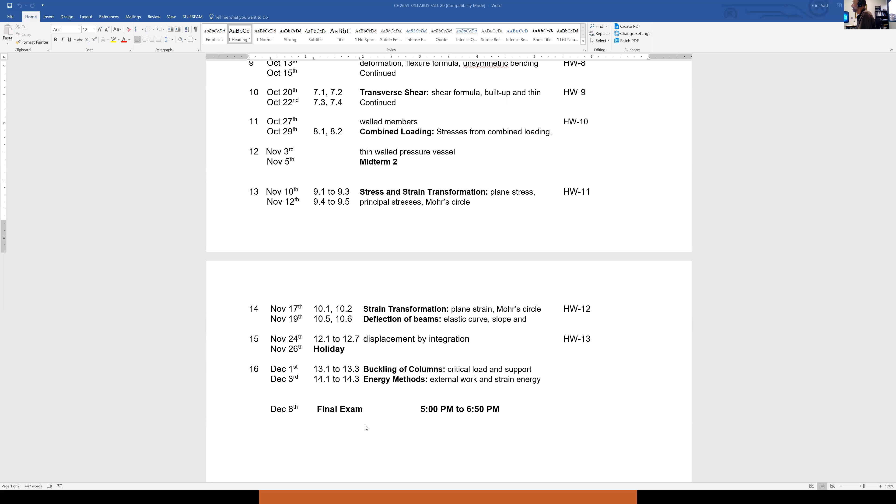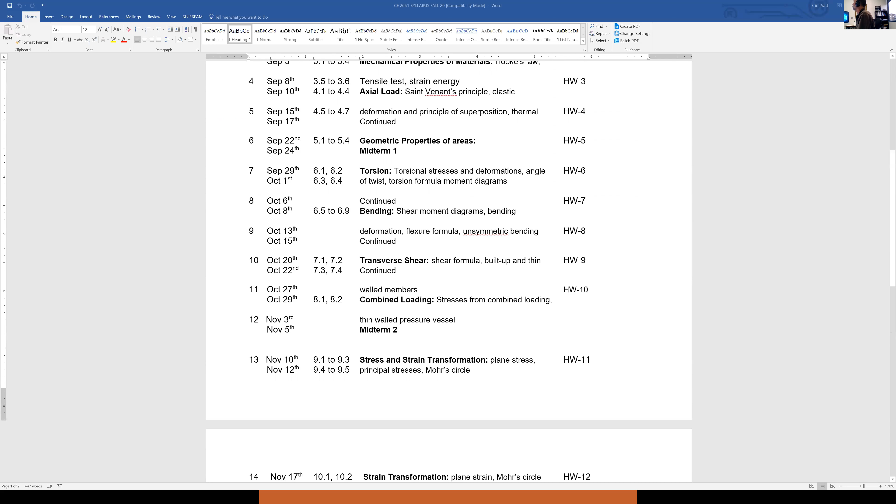Okay, and then let's do tonight. Tonight we talk about combined loading. Yes David, final will be cumulative. Tonight we talk about combined loading, where we are going to combine moments.

What we talked about last lecture, we talked about having biaxial bending, where you can have bending moments about the x-axis and or you can have bending moments about the y-axis. Well, now we're going to combine it all, no pun intended, to add an axial loading to moments that could be about the x or the y-axis.

So as I said, we have both bending stresses and axial stresses are normal stresses. Bending moments, My over I, create normal stresses. Axial loads cause normal stresses as well. So that means bending stresses and axial stresses can be added directly by superposition.

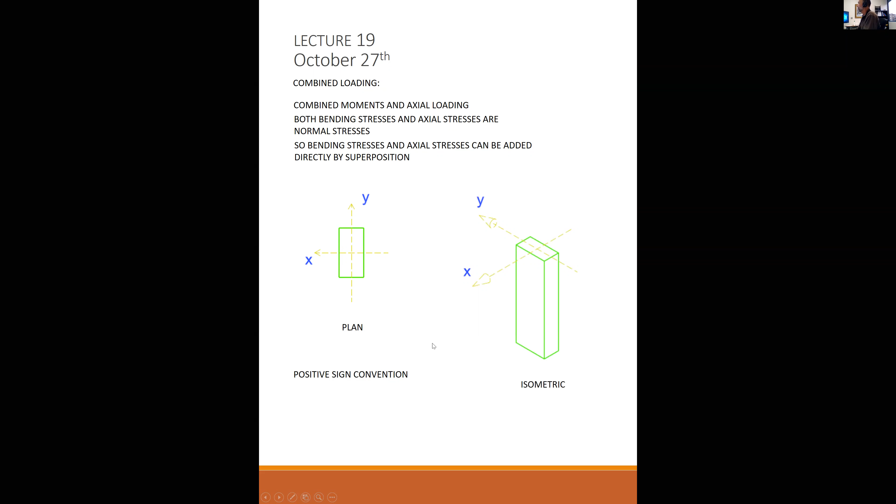Okay, so let's reiterate what a positive sign convention looks like. This is my positive x-axis, this is my positive y-axis. We talked about this last time when we introduced the flexural formula. And remember what I said, why is the x-axis off to the left? The answer is because I said it is, that's why, it has to be, or else positive moments won't cause compression in the top of the beam like they should. So if I look at an isometric view of my positive x-axis, my positive y-axis, it looks like so.

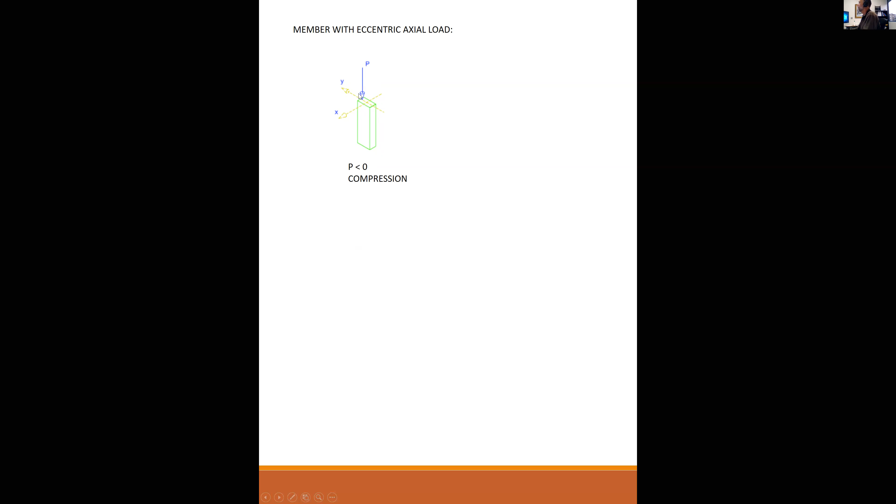So now we're going to add to our bending moments, we're going to add axial load. So if you have a load that is going down, then P is less than 0. P is a negative load that's going down and it's compressing the member. So if P is less than 0, that is compression, and as you can see, this block is being compressed by this load going down into it. If P is greater than 0, it is tending to pull the member apart, and that would be putting tension into there. So the sign convention is important when you start using the equations - you need to be sure you have the right positives and negatives where they belong.

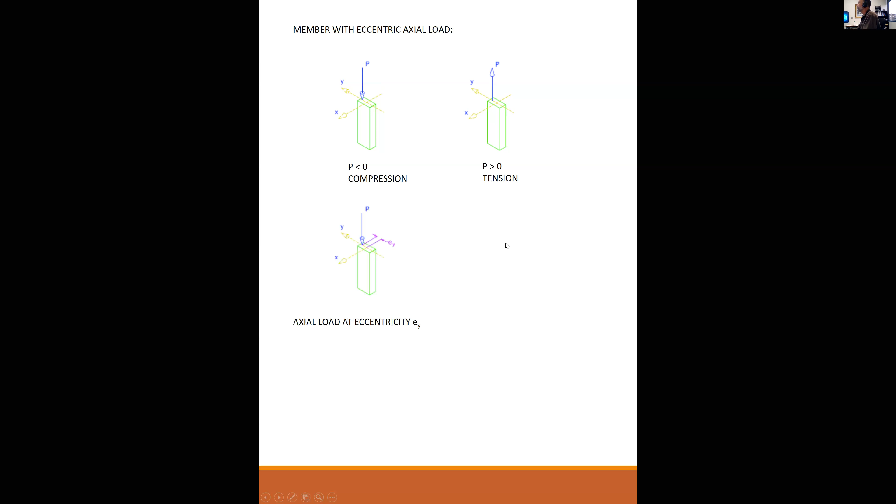So we can have an axial load at some eccentricity. Eccentricity, E sub y, in this case, is an eccentricity in the y direction. And an axial load at an eccentricity creates a bending moment. So we can replace an axial load at some eccentricity with an axial load located right at the centroid, and we have to add in a moment about the x-axis, m sub x. So m sub x is equal to the axial load P times the eccentricity in the y direction. This is a direct result of superposition.

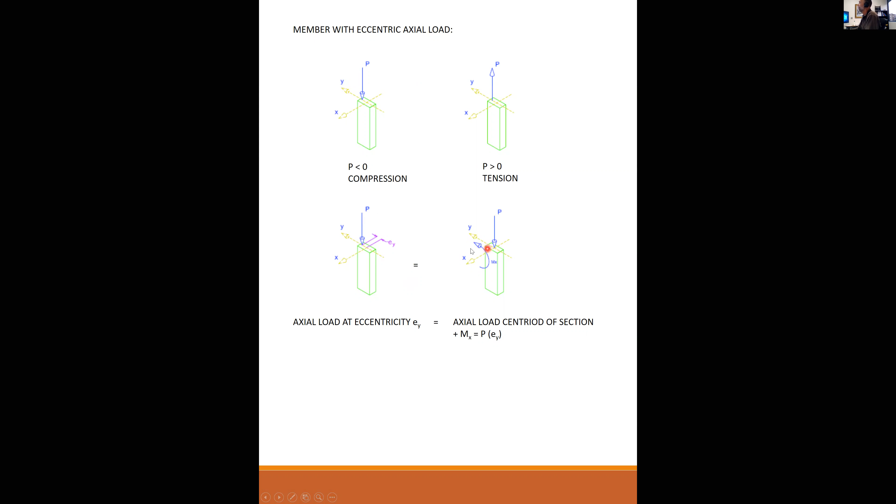And this is saying that this condition here, this axial load with this eccentricity, is equivalent to an axial load going right down the middle of the beam plus an added moment. And this is the way we're going to look at things. If you have this condition, you need to convert it to this condition so that we can solve it for your stresses.

Likewise, we can have an axial load that is located with some eccentricity to the y-axis, which is an eccentricity in the x direction. So this would be E sub x, an eccentricity in the x direction, and it is creating a moment about the y-axis. So I can take my axial load and relocate it on the centroid of the beam as long as I add a moment to compensate for that, that moment being equal to P times E sub x. So you can have an eccentricity in the y direction, you can have an eccentricity in the x direction.

You can have an eccentricity really in any direction, as long as you bring that resultant back to the 0,0 point at the intersection of your coordinate grid, the centroid of your beam, and add the appropriate moments.

E is a measure of how far off from the centroid that load is. It's inches, it's a distance. Does that answer your question? Yes, thank you. Okay.

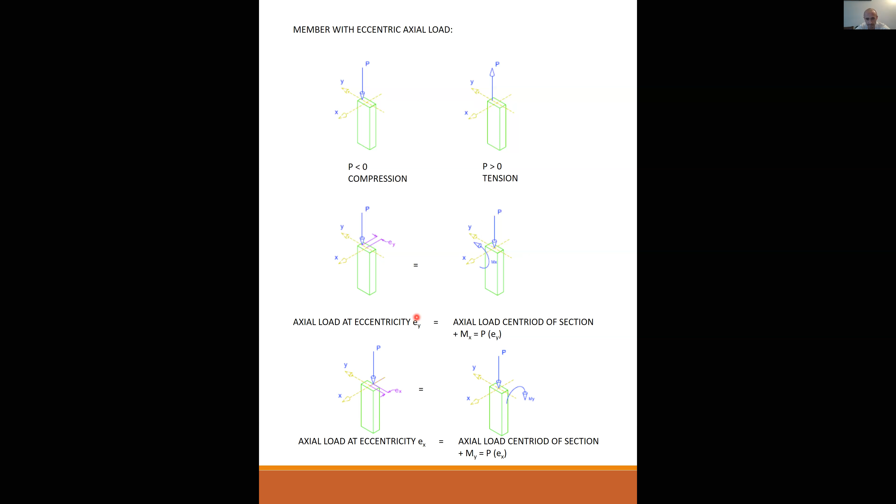All right, so if we pull it all together, axial loads create a stress. Remember, we're going way back to week number 2 or 3. Axial loads create a stress equal to P over A. We kind of started with that. And then we have our flexural equation here, minus mx y over I, plus, when we make it a biaxial equation, my x over Iy. So this is the total.

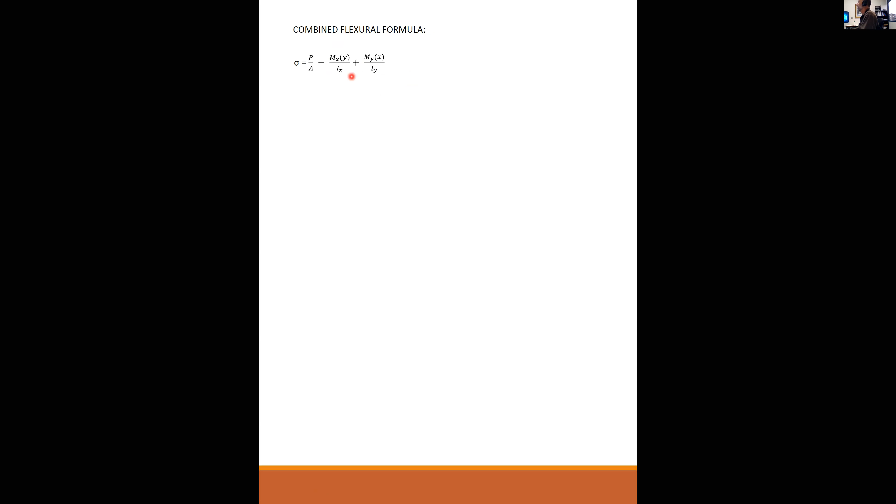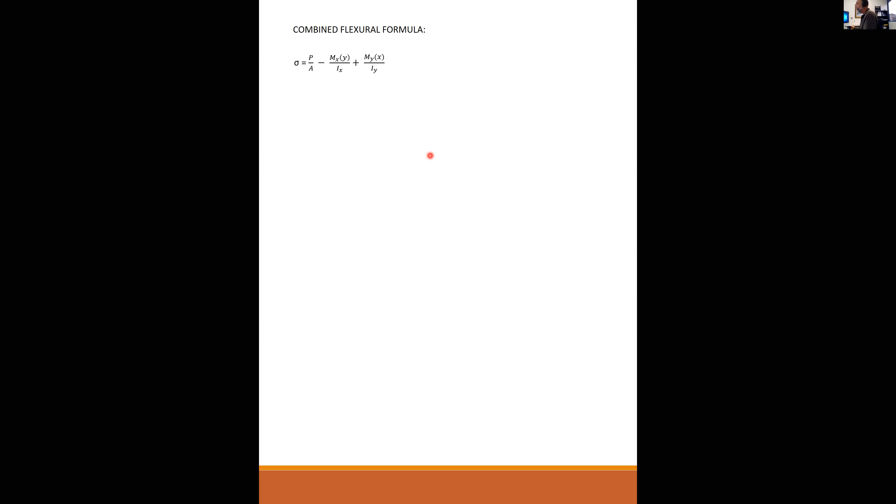When we first introduced P over A, that was just kind of a fraction of it. When we first introduced my over I, that was a fraction of it. This is the most general form of the equation that accounts for axial load, moments about the x, moments about the y. Any questions about this? Okay.

Again, if P is pointing down, then it is going to be less than 0. It is in compression. If P is pointing up, P is greater than 0, and it will be representing tension.

Mx and My are both equal to P times the appropriate E about each axis. The sign of P is determined by whether it's in compression or tension, whether that load is up or down. The sign of E, the eccentricity, positive or negative, follows your axes. If it's in the same direction as the positive Y, then it's a positive number. If it's in the opposite direction, it's a negative number. The combination of the two ought to produce moments that follow the right-hand rule for your sign convention.

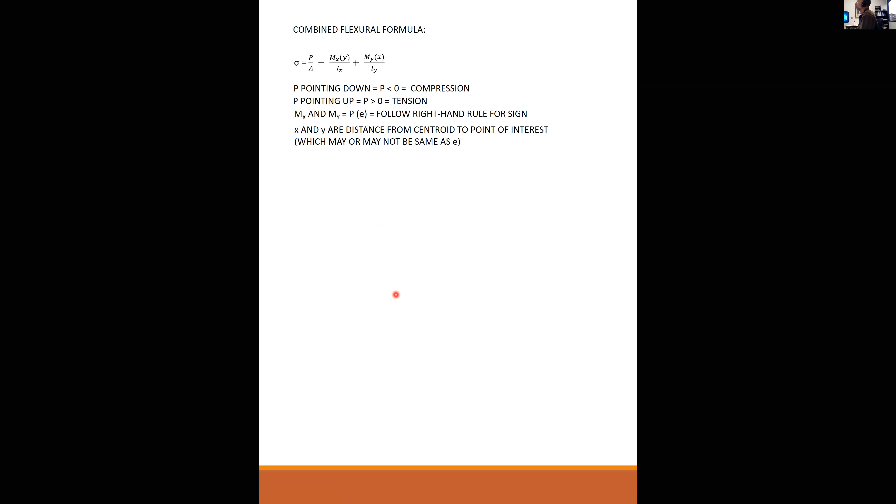And as I said, X and Y are distance from the centroid to the point of interest, which may or may not be the same as E. X and Y are positive or negative as determined from the sign convention of the axis.

Okay, so these X and Y's are the distance from the centroid to the point of interest, that's this guy and this guy, not to be confused with E. E is in the mx and the my, so E is the eccentricity of the load. X and Y are the distance from the centroid to the point of interest. Like if I say, what is the stress at the upper right corner, well then X and Y are the distances from the centroid to the upper right corner. That's not the same thing as the eccentricity of the load, okay?

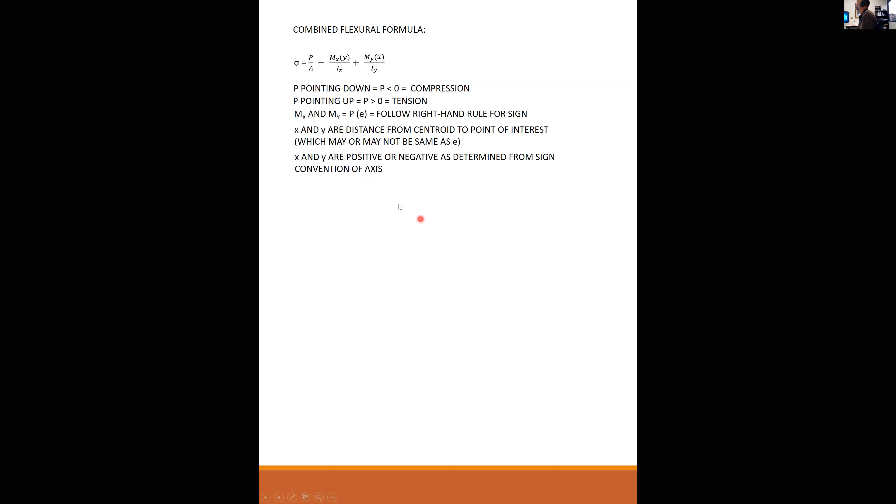So I think maybe some examples might help. Okay, so if this is our section, the good old 2x4, and this is my loading. My loading is 10 kips located on the y-axis. So the eccentricity in the x direction is 0, but the eccentricity in the y direction is 1.5 inches.

So if this is our situation, what are the stresses at this corner A and this corner B? First step, P is pointing down. P is tending to put this element into compression, it is compressing down on it. So we must take P to be minus 10 kips.

Again, I cannot reiterate enough how important it is to keep these sign conventions straight. Okay, so if I take my P and relocate it to the centroid, then I must add a moment to compensate for that effect. And that moment is equal to P times the eccentricity in Y.

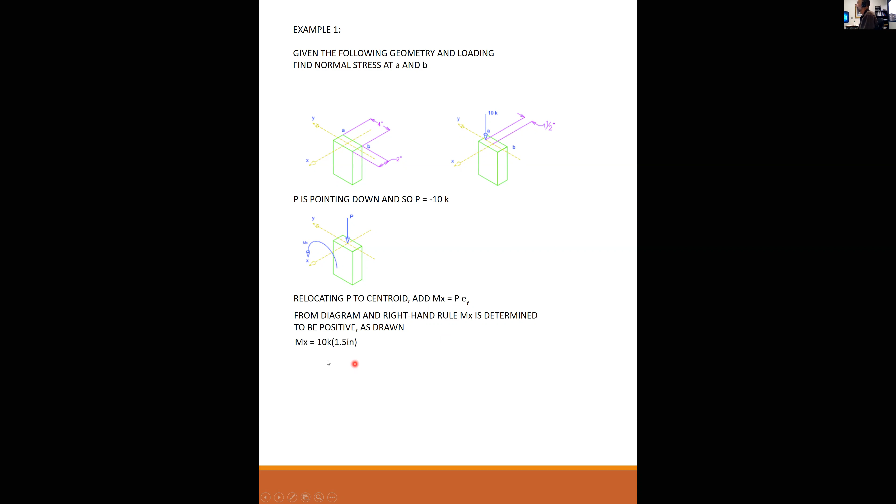From the diagram and from the right-hand rule, mx is determined to be positive as drawn. If I take my thumb along the x-axis and curl my fingers in the direction that this load would tend to rotate, then I get a positive mx. So mx is equal to 10 times 1.5 inches, which is 15 kip inches.

Okay, so let's slow down for a moment and really analyze this. It would be confusing, I think, to say right here, I said P is equal to -10. So why didn't I do -10 times positive 1.5 inches? The 1.5 inches is in the positive Y direction. The 10 I just said is -10. So how come the moment's not -15 kip inches?

Are you guys confused about that? Is this clear? Am I making it worse? What do you think? Well, is it the right-hand rule?

So what I'm saying is the final definitive answer on these moments is the right-hand rule. So if you look at this load, don't think of it as positive or negative for the moment. You just see that it's pushing down, and pushing down would tend to rotate this way. So I draw my moment in the direction that it would tend to rotate.

I'm replacing this eccentricity with this moment. And then I put my thumb on the x-axis, curl my fingers. Is it in the same direction as that moment? Yes, it is. So that means it's positive. So this is a positive 15 kip inch moment.

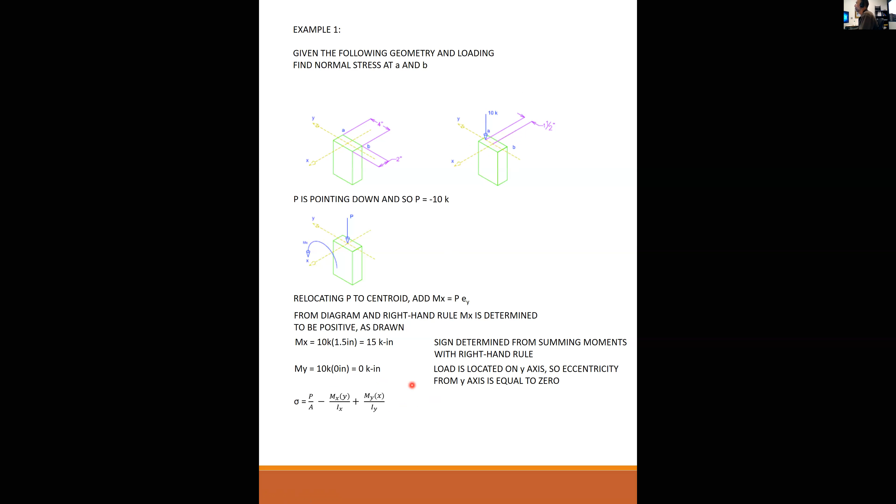Okay, so using my general equation for normal stress, the flexural formula, I can now start plugging in some numbers. The area of my 2x4 is 8 inches squared. The moment of inertia, we've got this memorized by now, is 10.67 inches to the fourth. Iy is 2.67 inches to the fourth. At point A—now here's where it becomes very critical.

E was the distance to the load, and we're saying use the right-hand rule to determine if that moment's positive or negative. But X and Y rigorously follow the axis conventions, okay?

So the A corner is this back corner over here. In the direction of Y, it is a positive 2 inches. In the direction of X, it is a minus 1 inch because it's opposite of the axis. This is followed rigorously, and is really the only way to get the proper X and Y values to plug into here and here to get your normal stresses.

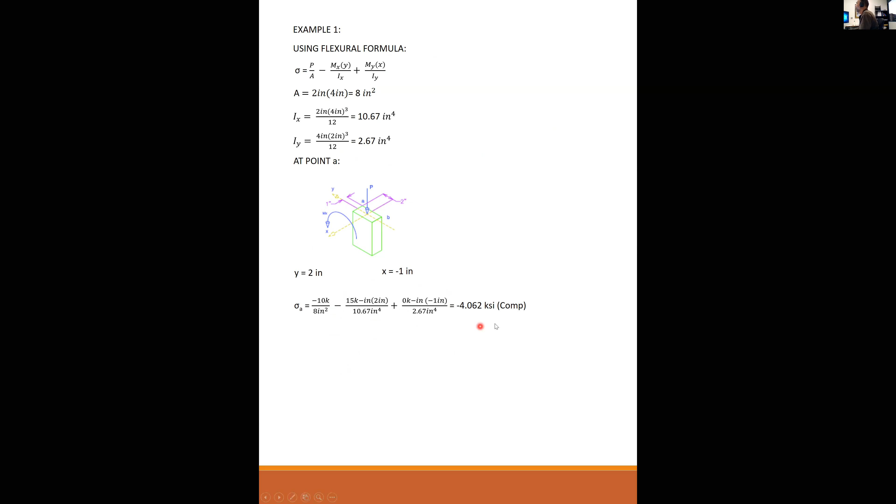Okay, so I'm now plugging in sigma A, the normal stress at A, is P over A. So there's where I'm saying that's where your minus 10 kicks in because it's putting it in compression. So minus 10 over 8 inches squared, minus my positive 15 kip-inch times a positive 2 inches over 10.67, plus my 0 moment on the Y. This is irrelevant at this point, but minus 1 inch is the X over 2.67. And I get a normal stress at A of minus 4.062 KSI in compression. Compression because it is negative.

At point B is the opposite corner. So there, my Y is going away from the positive Y axis, so I have minus 2. X is still minus 1. And so I go through the same equation, but now instead of 2, I have minus 2 for Y, minus 1 for X. Everything else is the same. And I get 1.562 KSI in tension.

Okay, any questions about example 1?

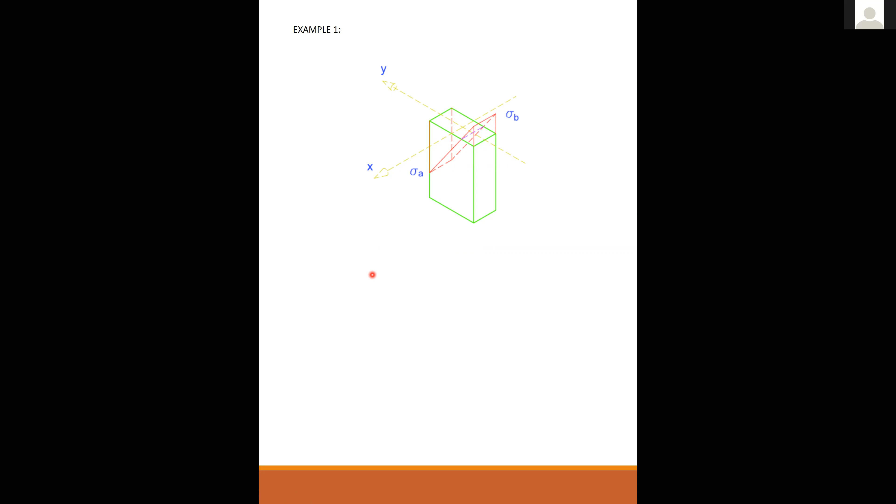When you're looking for the X and Y, like you said, at point A and B, X is -1 because it's in the back corner, right? Yes, positive X is to the left, and from the center, A and B were both 1 inch in the opposite direction.

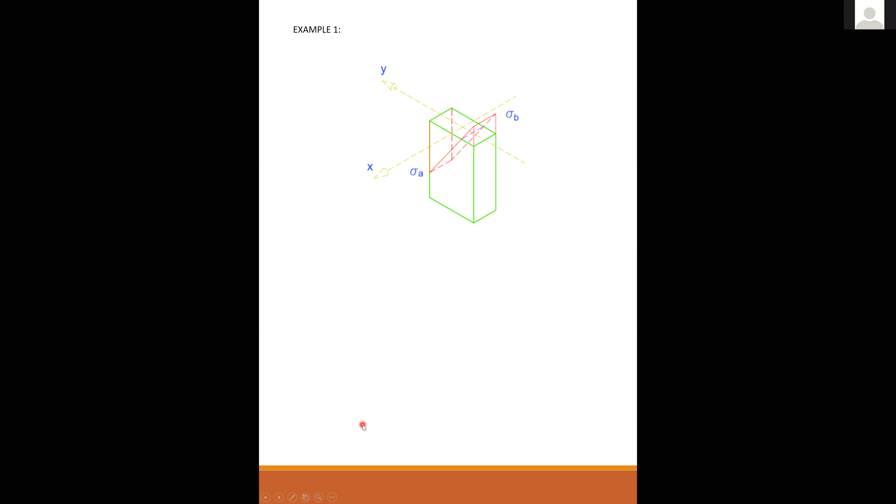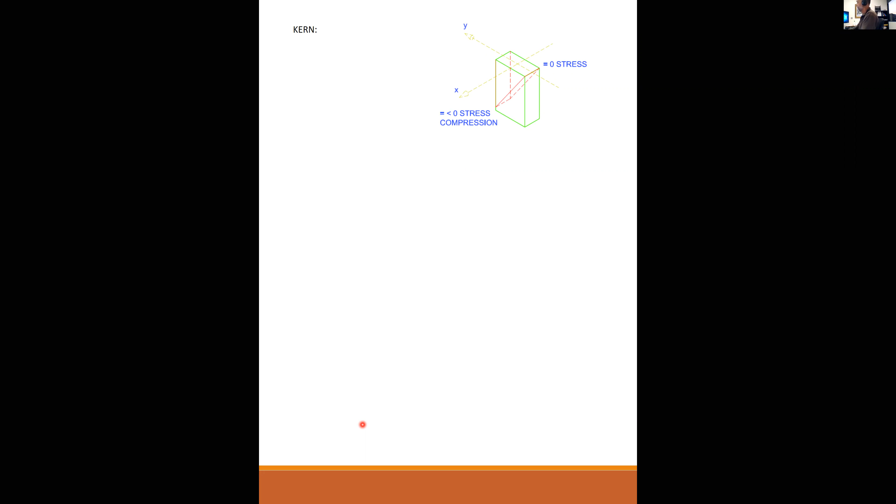Okay, I'm going to bring up a concept called the kern. And the kern deals with the idea of - actually, let me go back here one. Okay, as I mentioned, see this purple line right there? That's where you have 0 stress, 0 tension, 0 compression, just 0 stress. So here's a concept of a kern where if you keep the axial load within a certain distance, then you will never have tension in the member. If the load gets too far, then you will have tension. But if I keep the load in enough, then I do not have tension.

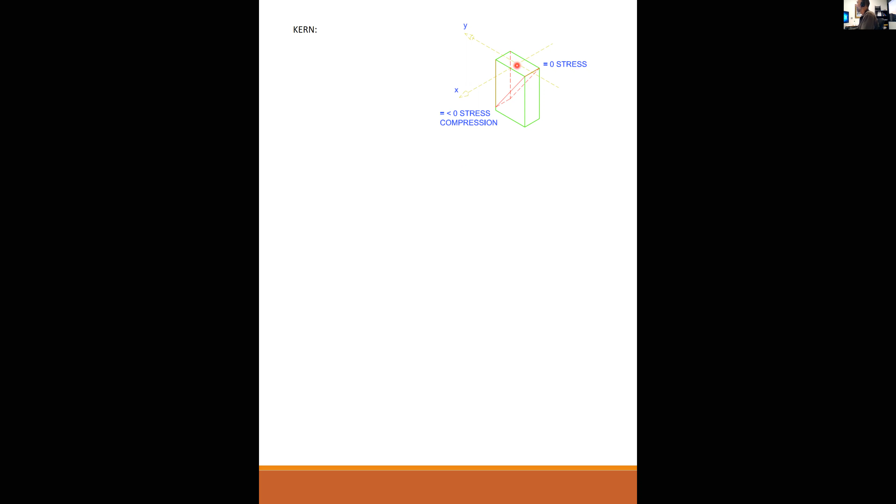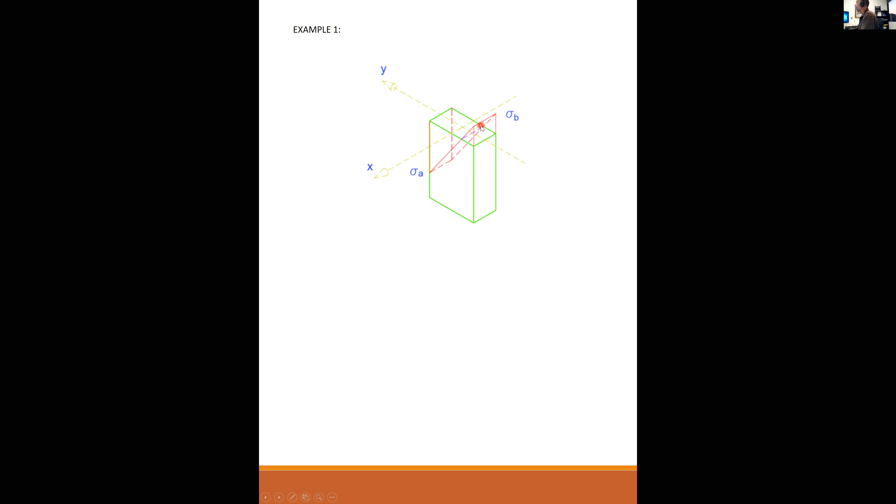So back to this example, the load was applied at 1.5 inches and I got this much tension. Well, if it wasn't 1.5 inches, but something less than 1.5, then I could design this to have no tension. So the kern is, where is that magic line? Where's that magic boundary where as long as I stay inside of that boundary, I have 0 tension?

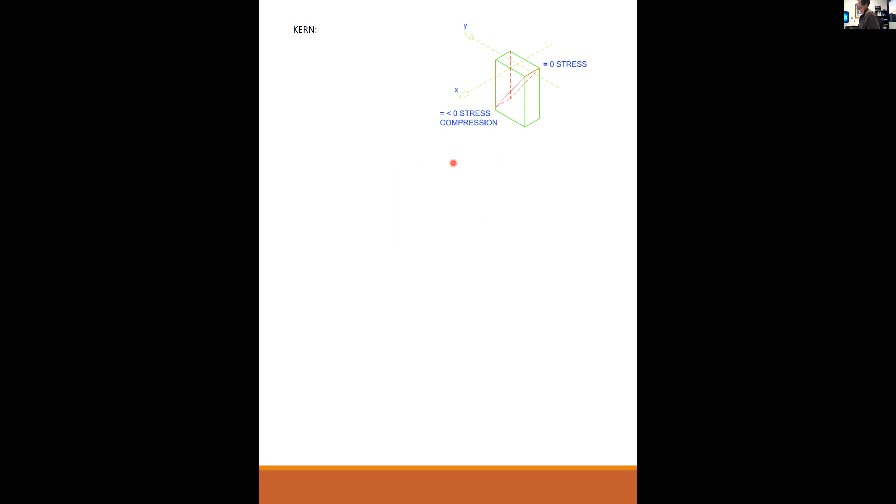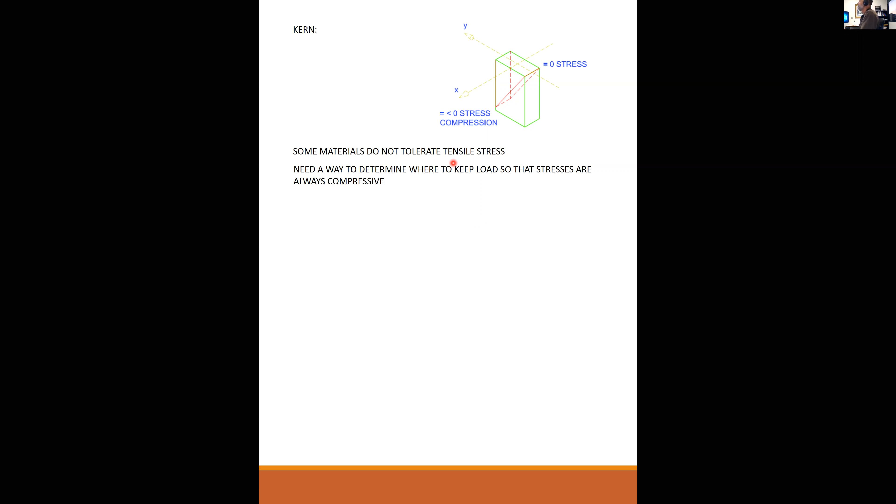Okay, so that's what we're going to be looking at. The reason? Some materials just don't tolerate tensile stresses very well at all. So we need a way to determine where to keep the load so that stresses are always 0 or on the compression side.

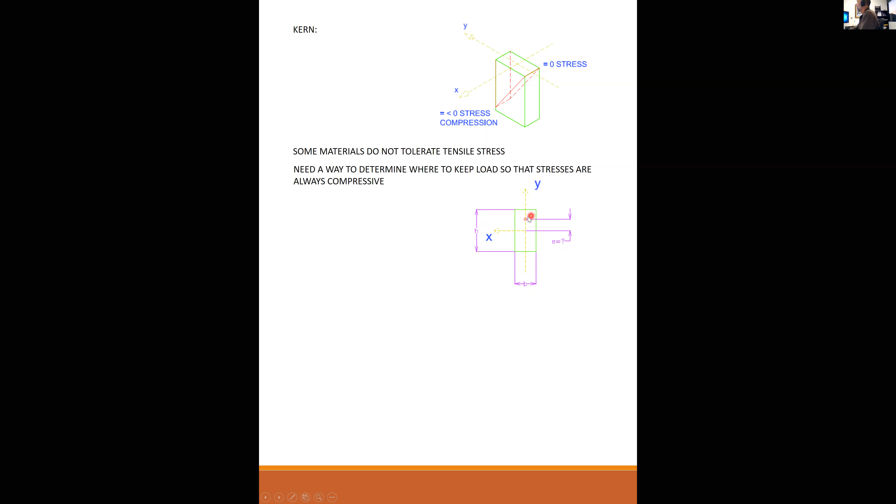Okay, so if I look at a plan view, this is my positive x-axis, my positive y-axis. I have my width b, my height of h, and we're trying to find this magic eccentricity that is right at the boundary of no tensile stress.

So if I look at my flexural equation, at the moment I'm not looking at moments about the y-axis. I just want to find it, since it's located on the y-axis. I just want to find my boundaries in the y direction with my moments about the x-axis. So I set my y moment term to 0, and I set the whole equation equal to 0. I want to find where's that magic eccentricity that produces exactly 0 stress.

Okay, so then I come down here and I made some substitutions. The area is equal to the base times the height. The moment is equal to P times E, and it's E that I'm looking for. Y is H over 2, and I sub X is BH cubed over 12. Okay, so everybody agree with my substitutions? Anybody not agree with my substitutions? Looks good. Okay, great.

I still set the whole thing equal to 0. Okay, so now I can make some simplifications. You notice that P washes out. The magnitude of the axial load doesn't matter. And B washed out. P and B both wash out. So I'm left with H over 2, H to the third over 12 equal to 0. And now I can start making some simplifications. I add this over here, and then I just solve for E, and E is equal to H over 6. That's the magic boundary.

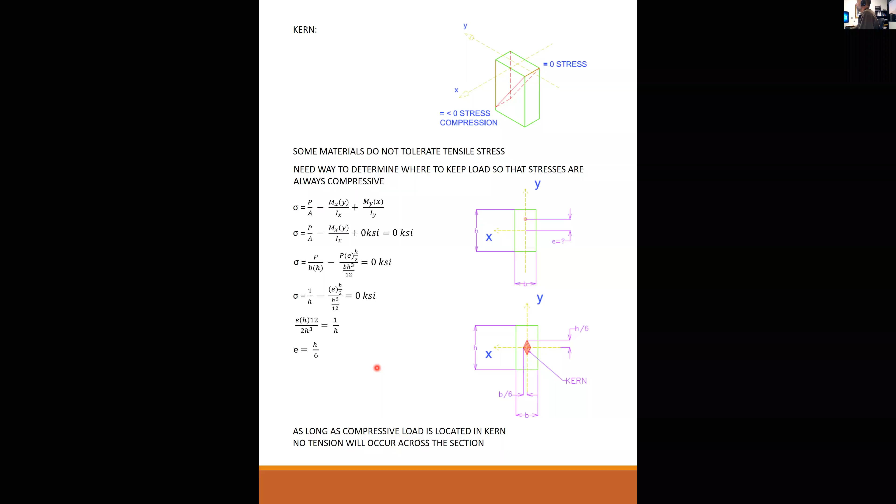Okay, all right. So this is kind of an important concept if you are trying to not have tension in your construction. So as long as the compressive load is located in the kern, no tension will occur across that section.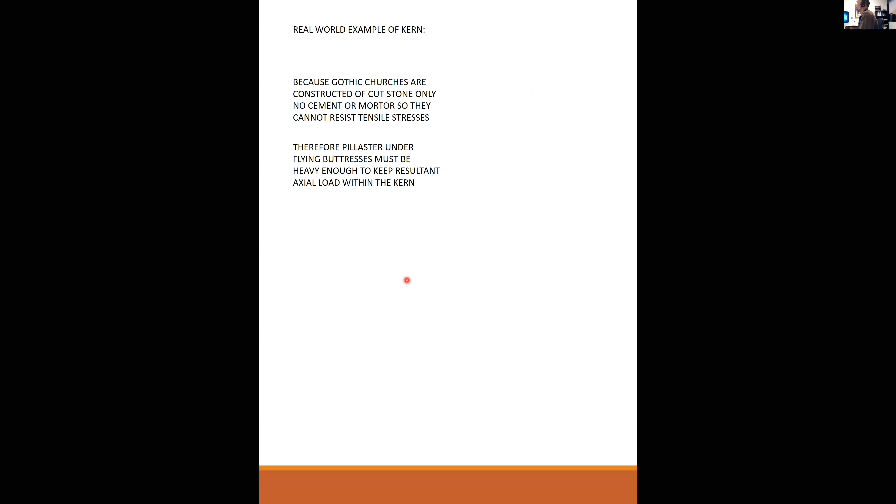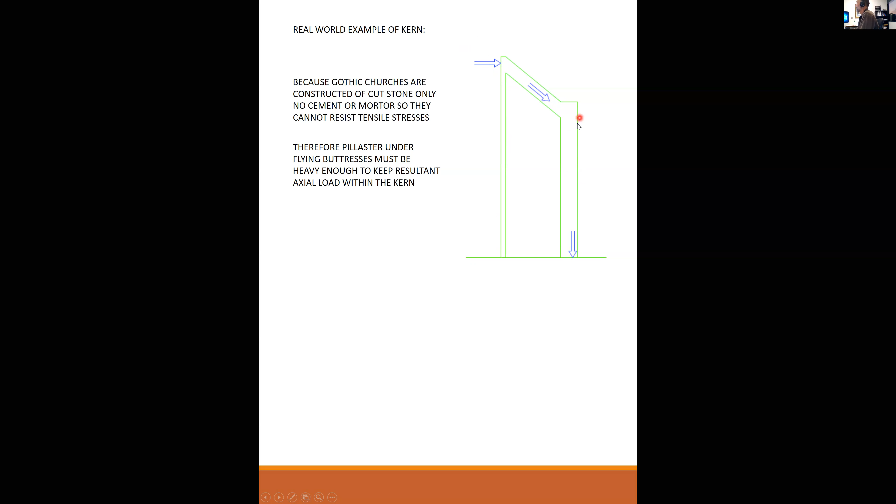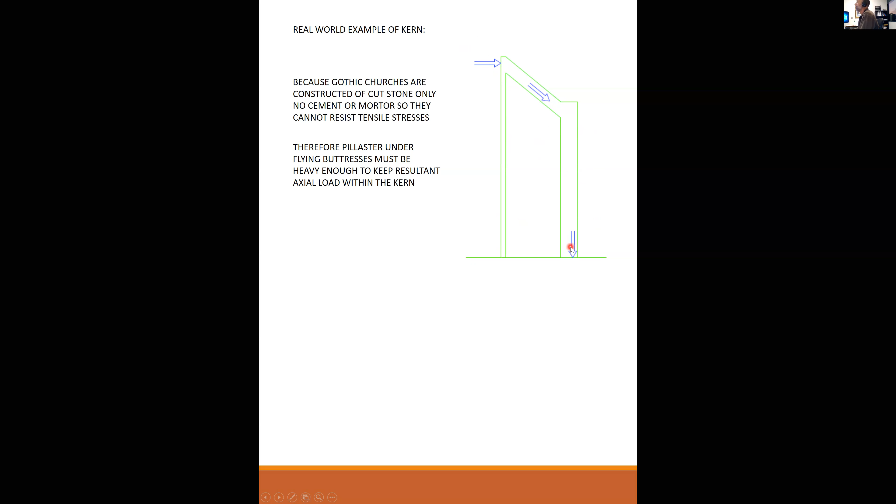Therefore, the pilaster under the flying buttress must be heavy enough to keep the resultant axial load within the kern. So here's this thin wall that has the big, large stained glass windows in it. This is the thrust from the mass of the roof above, and the thrust comes down the flying buttress, and it goes into this pilaster. Well, this produces an overturning moment on this pilaster. But as long as the moment and the weight keeps that resultant within the kern, then you have no tension.

Oops, that was my last slide. So that's a real world example of keeping stuff in the kern. What happens if this thrust produces a moment large enough that it's outside of the kern? How do you resolve that, so to speak?

How do you get that load back into the kern? Increase the width or the base, or increase the dimensions of the cross section, to make the kern bigger. What you can do is increase the weight on this, because the weight of it, remember, it's P times E. So the more weight you have, the less eccentricity you're going to have as well.

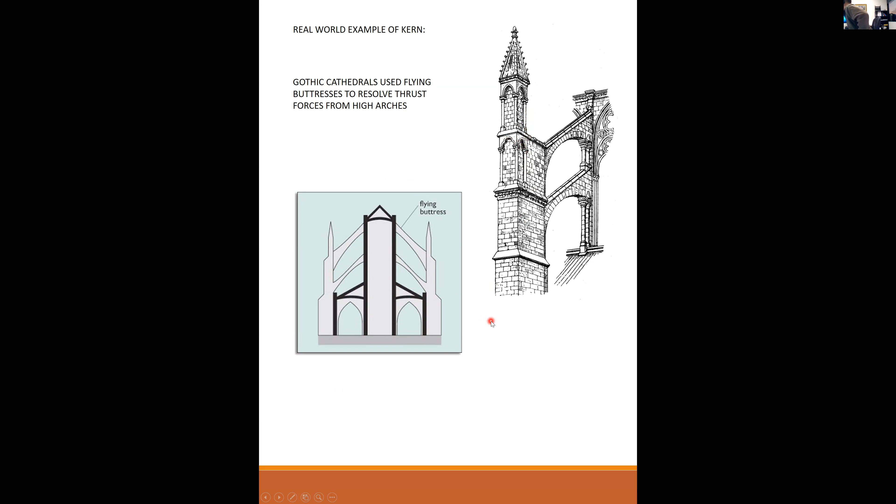So you have all these fancy adornments, all those gargoyles you see on Notre Dame. Well, those are structural gargoyles. They're there for a reason, to add weight to keep that thrust down. Okay, so any questions on the concept of the kern?

Any of you guys old enough to have watched The Simpsons? Do we have any Simpsons fans? Yeah, okay. This is probably, I know they're probably on year 30, 35 or something. But way back when, season 4 or season 5, I don't remember when it was, The Simpsons had an episode with a hurricane that came through Springfield and wiped out everybody. So everybody pulled together and rebuilt the Simpsons house. Anybody remember this one? Okay, nobody remembers this one. Well, you know what, it's on Disney Plus, isn't it? You can go back and find it.

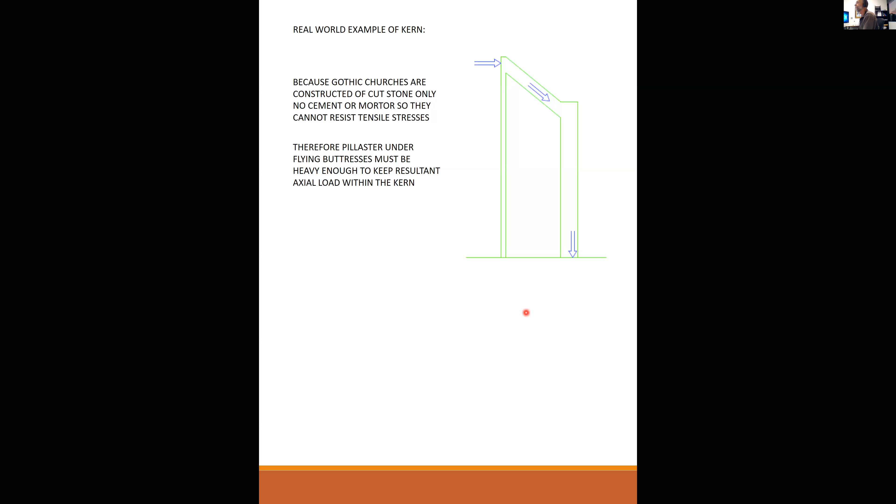Well, there's a scene where Bart Simpson goes up to his room and there's a poster of Krusty the Clown. I forgot if it was Bart or somebody else, but he said, I don't like Krusty the Clown, and they ripped the poster off. He goes, no, you can't do that, that was a load-bearing poster. Maybe it was the Flanders' house. Maybe you're right, maybe Flanders. Yeah, but it was a load-bearing poster. So that was the one show that us goober structural engineers really appreciated. That's what I mean by a load-bearing poster, that's a structural gargoyle, you know.

All right, moving on.

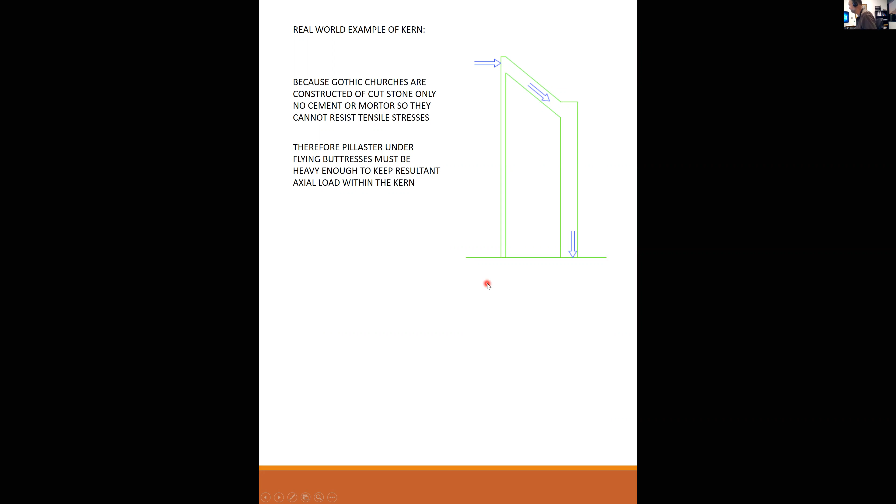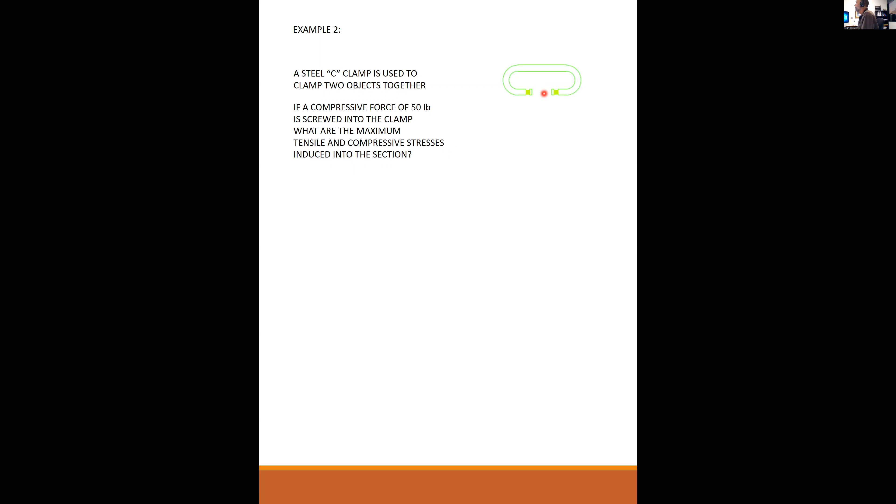Example number 2. We are going to look at a steel C-clamp used to clamp two objects together. If a compressive force of 50 pounds is screwed into the clamp, so you expand these two screws until you exert a force of 50 pounds, then what is the maximum tensile and compressive stresses in this section up here? That's what we want to find out. If the body of the clamp is 1/4 inch wide and 3/4 inches deep, we want to know what is the stress at the top and bottom of this section of the clamp.

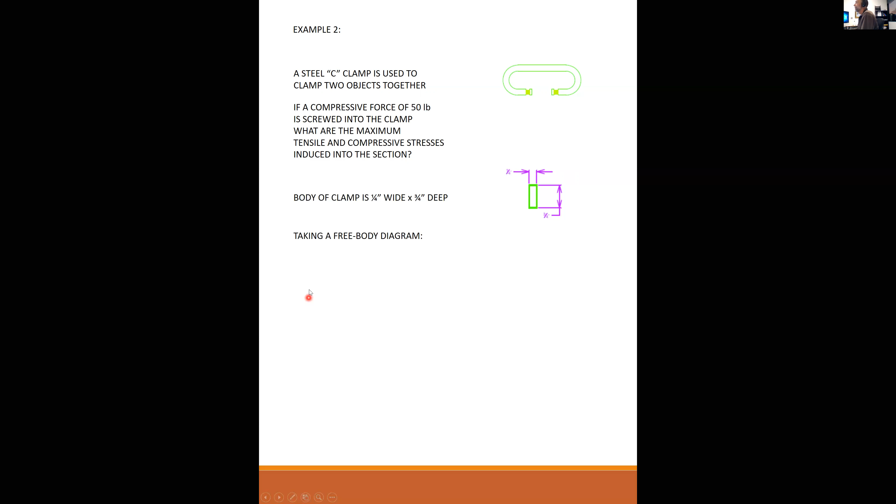So taking a free body diagram, here's half of the clamp, and this 50 pounds is compressive, pushing into the screw. We have a moment and a normal axial load at the section we are concerned about. The eccentricity of the load is 3 inches for this C-clamp. So we sum our forces equal to zero, and we have 50 minus N equals zero. So 50 is positive, 50 pounds, and it is in tension.

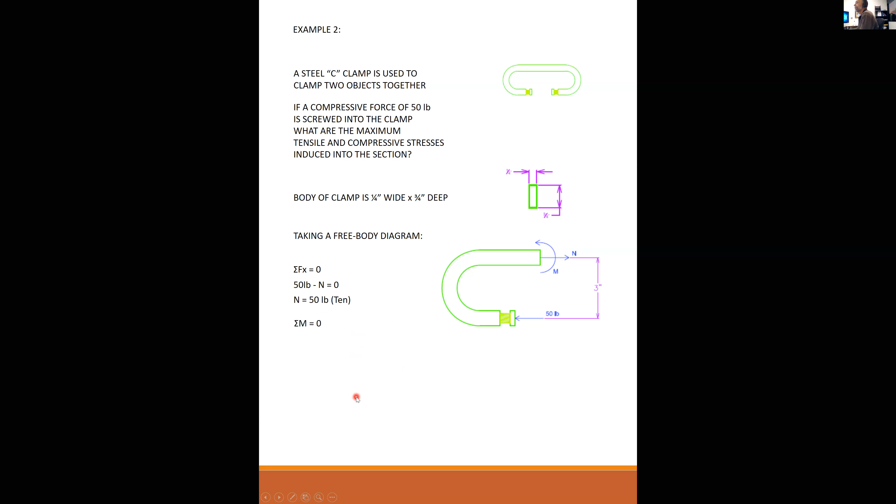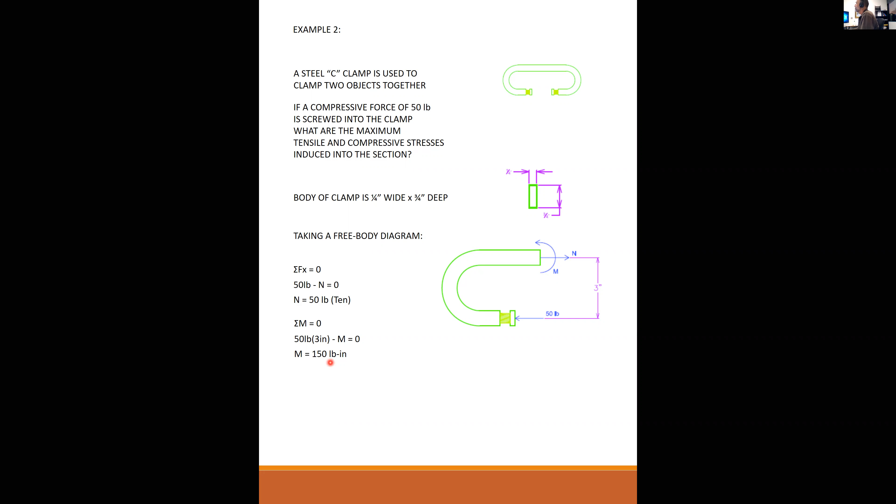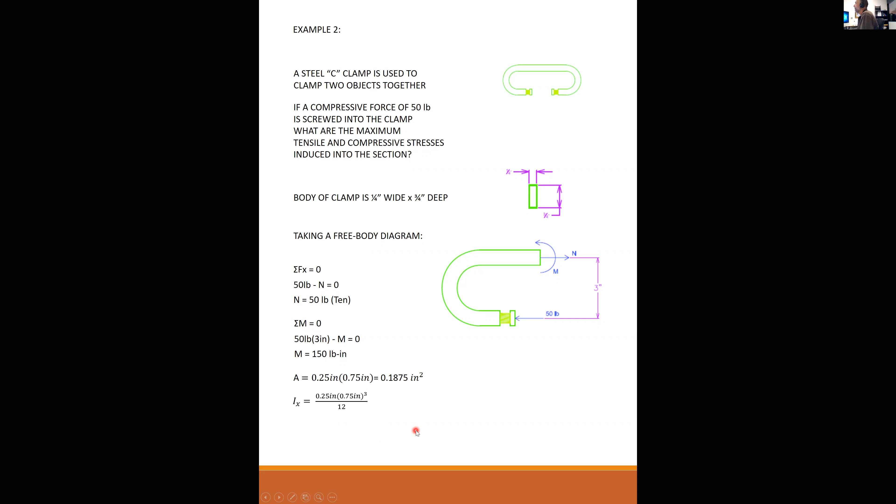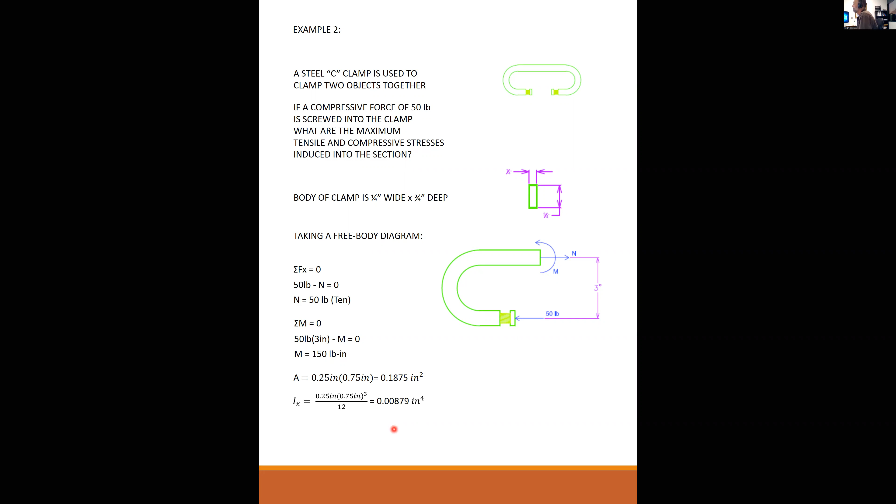Our moments, we sum our moments equal to zero. We have 50 pounds times 3 inches minus M equal to zero. Our moment is 150 pound inches, which doesn't sound like a lot, does it? 50 pounds of tension, 150 pound inch of moment. So the area of my section is 1/4 by 3/4, 0.1875 inches squared. My moment of inertia is 1/4 times 0.75 inches to the third over 12, that's really, really small, 0.00879 inches to the fourth.

Wait, yes, sorry, can you go back just real quick? Sure, sure. Okay, thank you, okay.

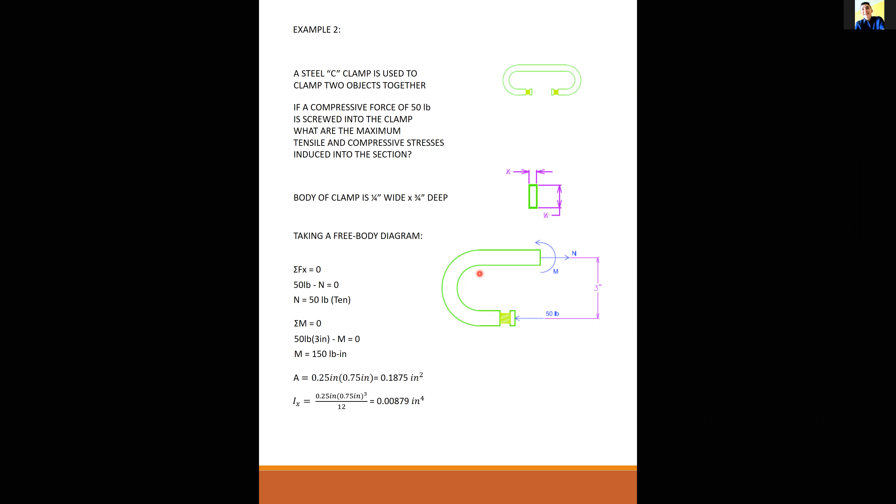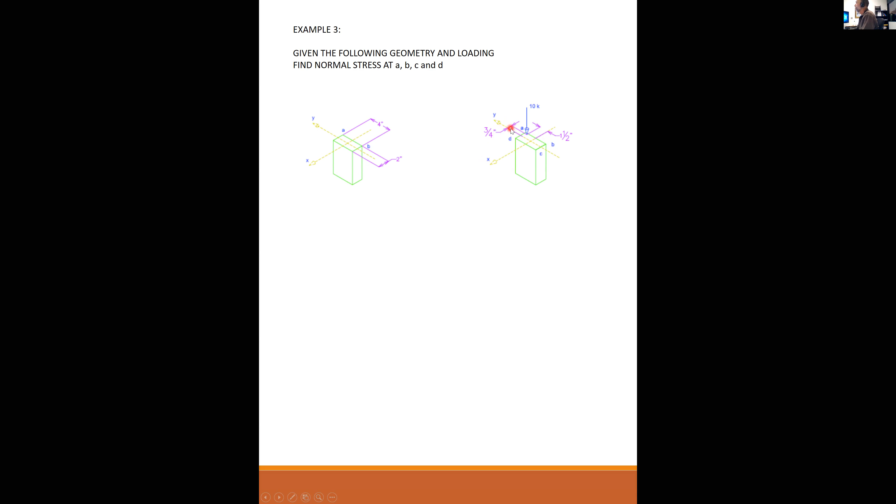I have to relocate the load to the centroid. Using the right-hand rule, I have a positive X moment and a positive Y moment. So MX is P times eY, and MY is P times eX. From the diagram and right-hand rule, both MX and MY are determined to be positive as I've drawn them. So MX is 10 times 1.5, which is 15 kip-inch. MY is 10 times 0.75, so that's 7.5 kip-inch.

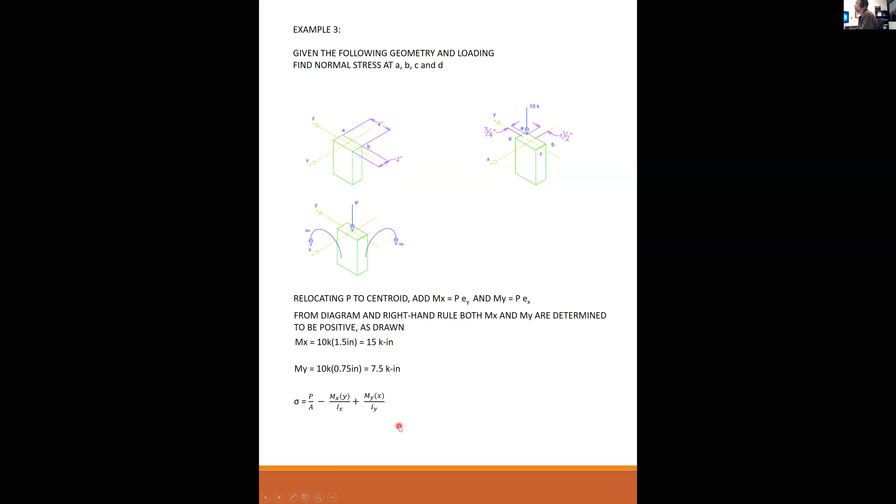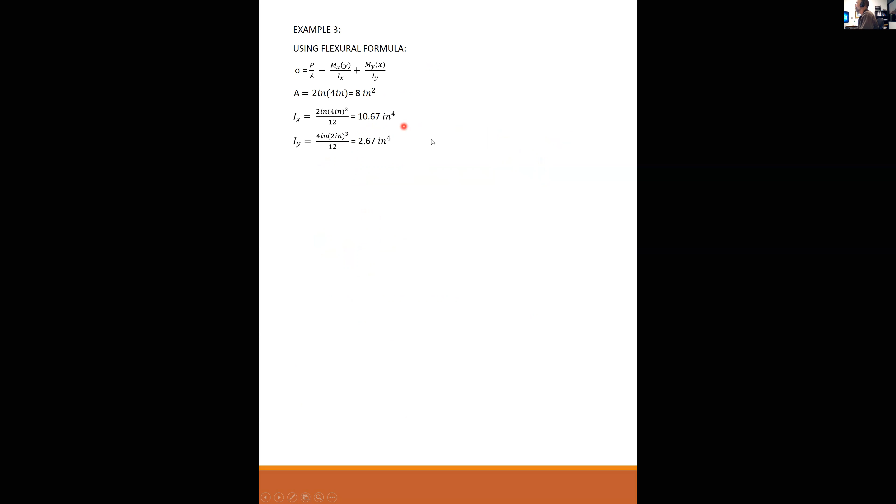So now I can lay into my flexural equation. My area, we have these memorized by now: 8, 10.67, 2.67. So at point A, and I redrew this in plan view so you can see where A, B, C, and D are located. At point A, Y is equal to 2 - I went up 2, and I went over -1.

So I plug in P over A. This is compression, it's going down, so that's -10 over 8, minus my 15. 15 was positive, 2 is positive, plus my 7.5. 7.5 is positive, x is negative, and I get minus 6.871 KSI, negative, so it's in compression.

Once you have written this out for one corner, it's super simple, especially using Excel, to set it up for all the rest of the points, because the only thing that changes is x and y. So at point B, now I'm down 2, and I'm still negative 1 over. So minus 2, minus 1, I plug them in, and I get minus 1.247 KSI in compression.

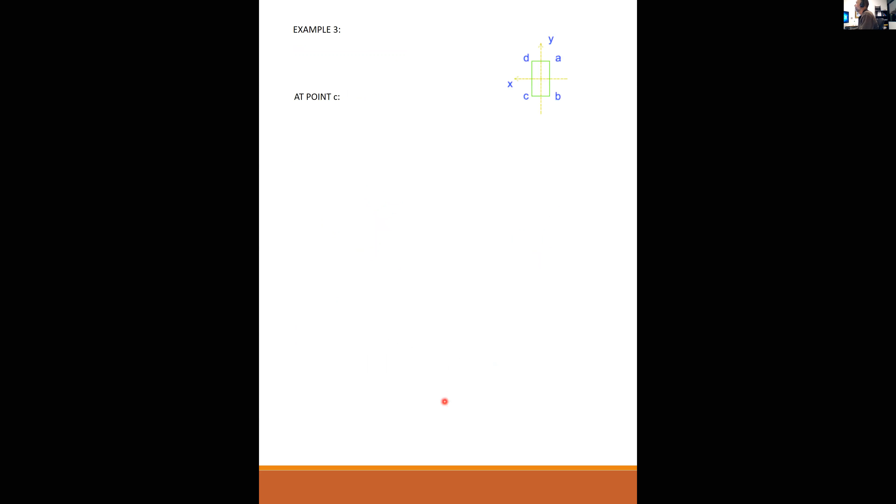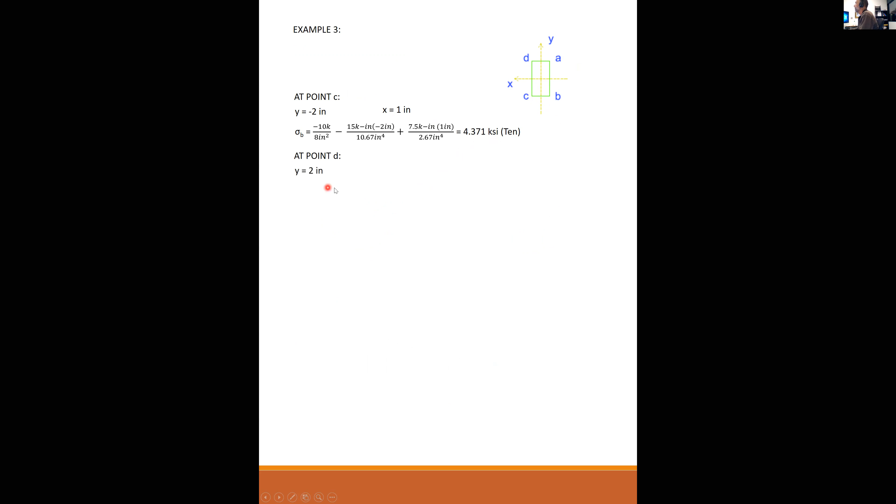Point C, y is minus 2, x is positive 1. This becomes very repetitive, but minus 2, positive 1, and I have 4.371 KSI tension. Last point D, positive 2 up, positive 1 over, and I plug these in: minus 1.253 KSI in compression.

So I want you guys to see that the point of interest, A, B, C, or D, determines X or Y, but it does not change the sign of the applied moment. The applied moments were found by the right-hand rule, so that doesn't change. The axial load, the area, and the section properties like moments of inertia don't change either. So once you've written this out for one corner, the only thing that changes from any other location of interest is the coordinates of x and y.

So now I can draw this out in three dimensions, and these are all the corners drawn to scale. Positive is in tension, and B, A, and D were all in compression, negative. So this is actually like a solid shape, and the purple line again is the neutral axis.

Mustafa asks about finding the average - we plugged the stress P over A. Which average are you looking for? In this method, we're just finding the stress at specific points. And the average, if we want to find the average stress, we have to plug just P over A, right? Such as in the units in chapter 1 and 2, I think.

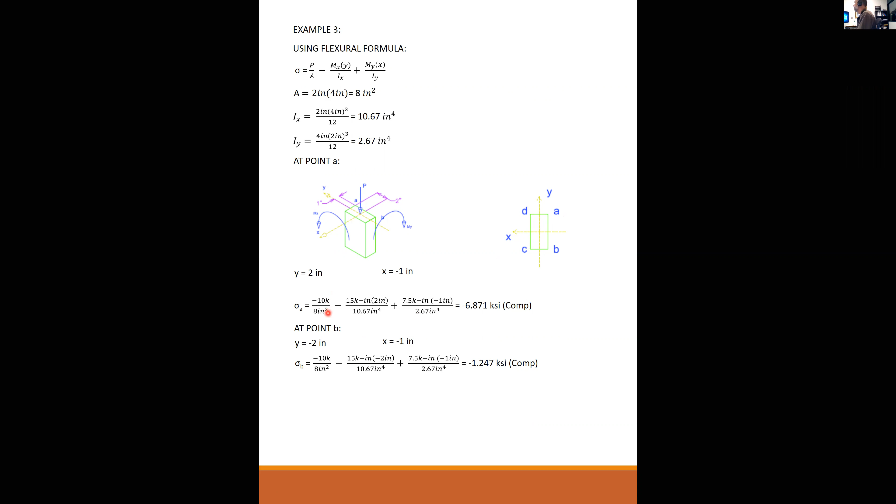4.371, minus 1.247, minus 6.871, divided by 4 - I do believe that's true. So I took the average of the four corners and I got P over A. P over A is minus 1.25. Minus 10 over 8 is minus 1.25. I took the average of the four corners - right there, so I averaged A, B, C, and D, and I got P over A. So yes, Mustafa, I think you're correct.

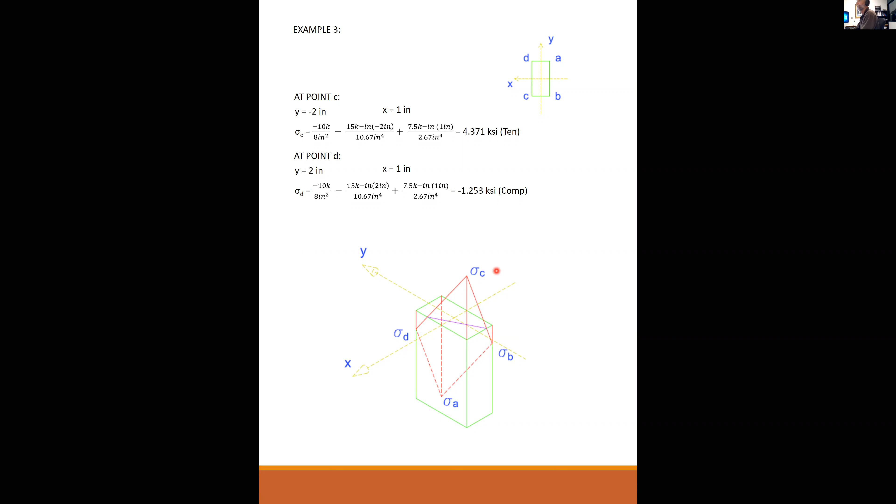Okay, you guys ready for example number 4?

This one is an interesting one. So what I have created for you is some sort of a steel fixture welded to an embed plate that is fixed to a wall, and it has a tube steel welded to the wide flange, with a cap plate, and we're putting these loads in here at the top of this tube steel.

So we have the loads as noted, and we have these eccentricities from the center of gravity of the steel beam of 24 inches and 36 inches. And this is my local coordinate system, X, Y, and Z.

Okay, so everybody see the problem statement? So what we're gonna ask for is find the normal stress at A, B, C is at the centroid, E and D, D and E, of course.

So the dimensions that we need here is 2.015 from the y-axis to the corner there, and 3.14 from the centroid to the top or to the bottom there. Even though that looks a little funky, it's meant to be from there.

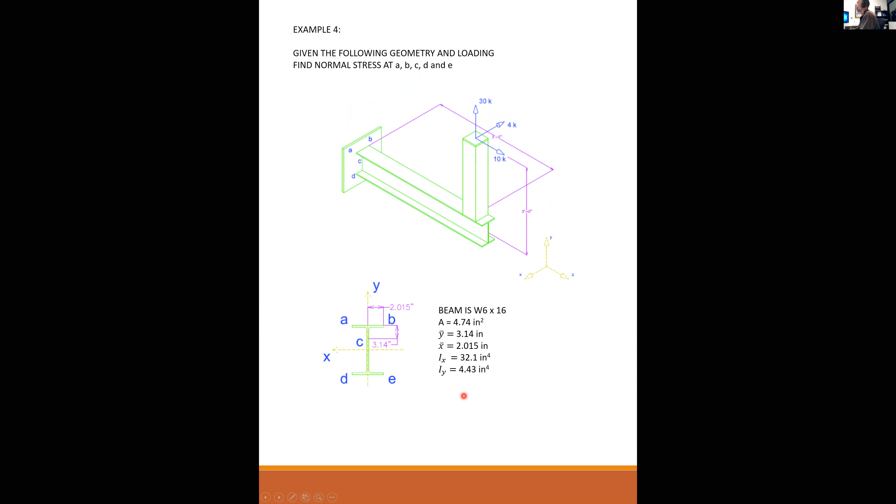Okay, no problem. So how many reactions do we have? Well, good question, you tell me, how many reactions do we have? Should be, I don't know, 3 or 2 at the moment. How many degrees of restraint do we have in a three-dimensional problem? Is it at A, 6 degrees of restraint, right?

6, we have 6 degrees of restraint. We have reaction forces in the X, Y, and Z direction, that's 3. We also have rotational fixity about the X, about the Y, and about the Z, so that's 3 more. 3 forces and 3 rotations that are all fixed at point A on this diagram. So you have 6 unknowns to restrain this, right?

Okay, so if we start by summing our forces, the first one we're going to look at is our reaction. I'm calling this, this whole end, A. So my reaction at A minus the 4 kips is in the X direction. So I have a 4 kip reaction, and I'm kind of drawing this in my isometric direction this way.

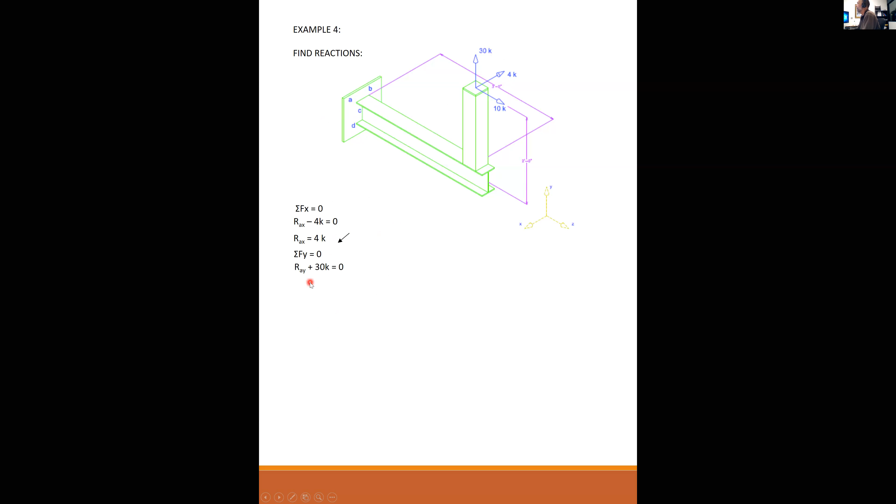Sum the forces in the Y. I have my reaction at A plus 30 kips up, so my reaction at A is minus 30, or down. And I have my reaction at Z equal to 0. I have my reaction at A plus 10 kips. This guy here is located along the Z axis, so I have minus 10 kips. My reaction is in the opposite direction.

Sum the moments about X. Okay, so this is my X. So I have a restraining moment about X. I have 10 kips with a 24-inch eccentricity trying to rotate about X, and I have 30 kips with a 36-inch eccentricity also trying to rotate, but in the opposite direction about X. So I sum them all together. The 4 kips doesn't play into this because the 4 kips is collinear, parallel with X.

There is no eccentricity about X for the 4 kips, so that drops out. I sum this up and I have an 840 kip-inch reaction about the X.

I do the same for the Y. About Y is anything trying to twirl this thing about the Y. So I have 4 times 36. The 10 kips has 0 eccentricity, and the 30 kips is collinear, so it has 0 eccentricity. So only the 4 kips times the 36-inch eccentricity. So my moment about Y is minus 144 kip-inches.

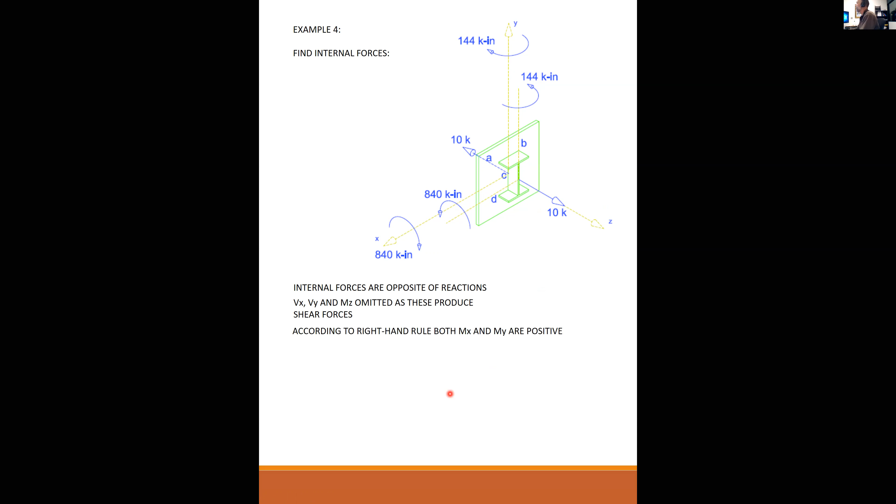So Vx, Vy, Mz omitted as these produce only shearing stresses. According to the right-hand rule, both Mx and My are positive. Mx is 840 kip inch, My is 144 kip inch, and the axial load was tension.

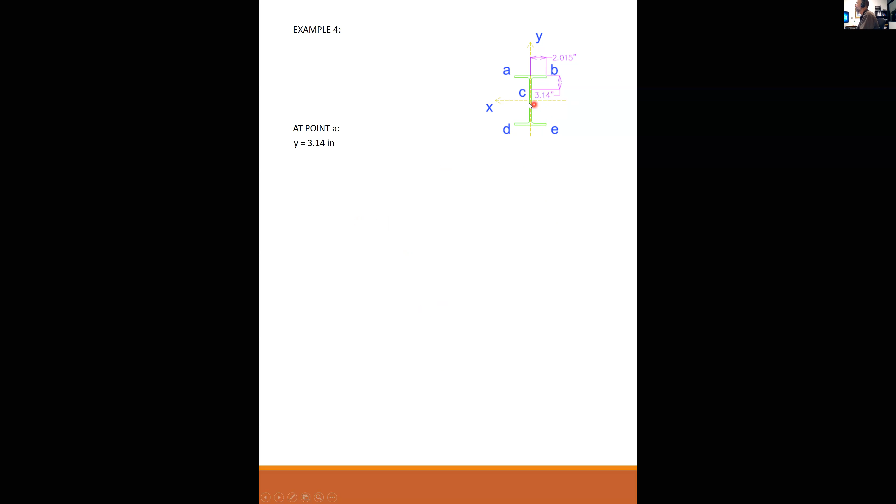Okay, so now we can start using our flexural formula at point A. Y is positive 3.14 because I'm going up to get to point A. X is 2.015 inches, positive because I'm moving to the left to get to A. My load was tensile, so that's 10 kips tension, minus positive moment, positive Y, plus positive moment, positive X, and that gives me minus 14.56 KSI in compression.

Once you've set it up correctly for one point, the rest of the points fall in really easy. So for point B, I am up 3.14, but I am in the opposite direction to get to B as the positive X, so that's minus 2. I plug positive, negative, and I get minus 145.56 KSI in compression at B.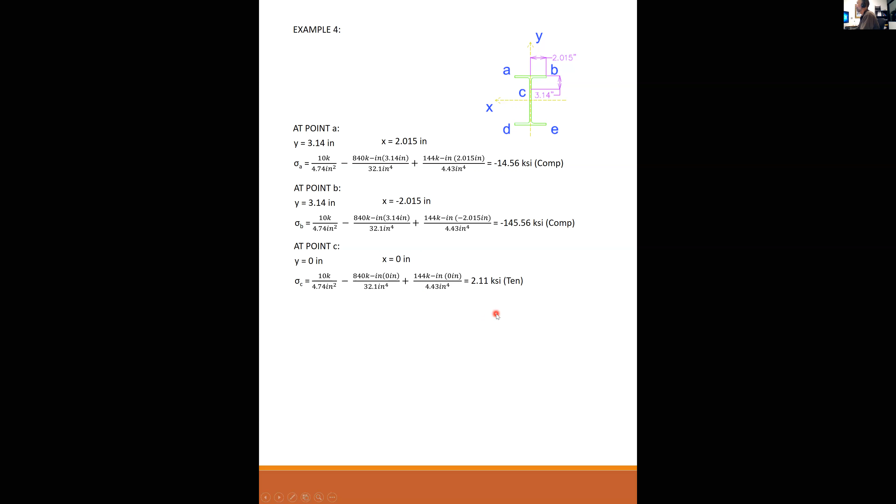At point C, Y is equal to 0. Point C is right at the centroid. X is equal to 0. So therefore, at point C, I have 10 kips over A minus my moment times 0 plus my moment times 0, and I have 2.11 KSI in tension at the centroid.

At point D, now I go down 3 inches and I go positive over 2 inches, plug and chug. I get 149.78 KSI in tension.

At point E, I am down 3.14, I am over minus 2. Plug and chug there, and I get 18.78 KSI in tension. So these are my normal stresses at each one of these locations. That's the last part of this example. Do I have any questions?

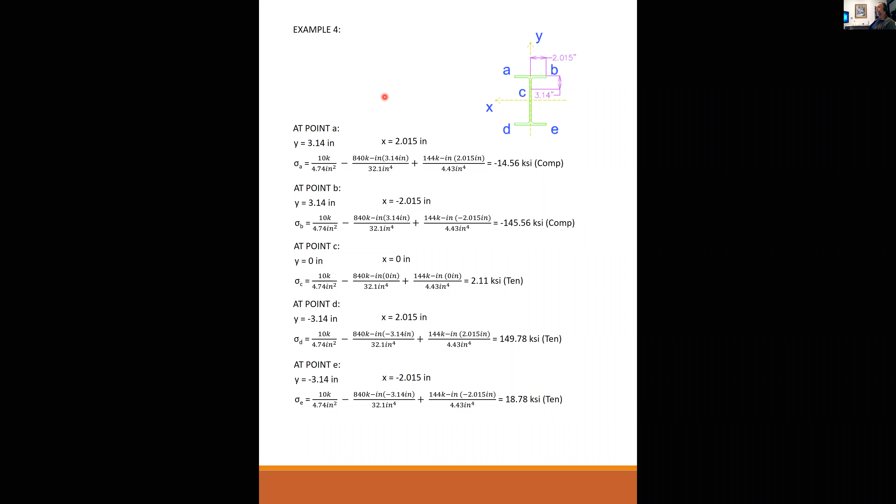For the reaction that you said... is that the A over here in your diagram?

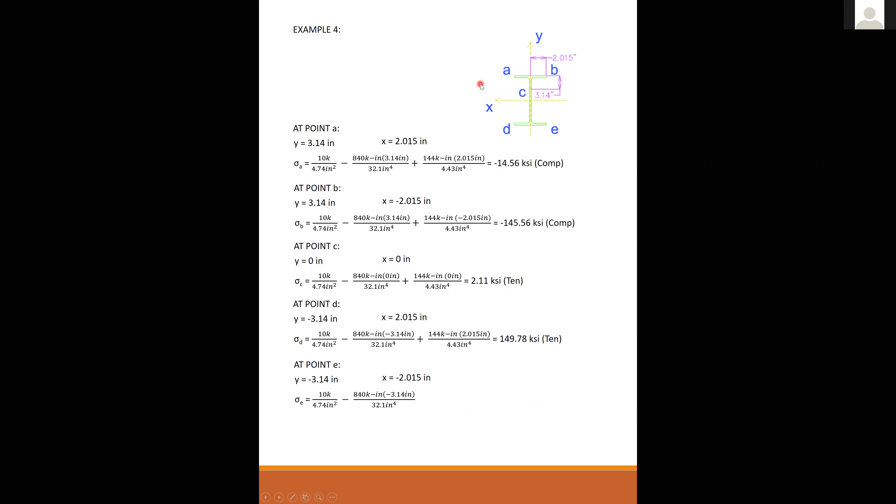Not exactly. Okay, so the A in this diagram is just locating this corner, right? That corner. And then let's go back up—there's a number of slides, but let's go back up. Okay, so little a is just that corner right there.

But I think what you're asking is here, when I said reaction at A, RX, that was just meant to be this whole end. Oh okay, so I was just finding the reactions at this fixed end. I apologize, that's kind of a bad choice, but I could have made this capital A and made that capital A and capital B over here. But once we had all of the forces at this end of the beam, then I designated each one of these little locations within the beam like a local reference point to be little a, b, c, d, and e. Oh okay, that makes sense. Yeah, sorry, I could have used a capital A or something else to make that clearer.

And also, I did kind of skip ahead because I wasn't really focused on finding the internal forces of this beam, but this equal and opposite relationship, you could prove this by the longer way to do this problem, and I would have totally run out of time. But the longer way to do this problem is, once you found your reactions here and these forces, you would take a cut through here. Once you take that cut, you would sum up your internal forces, your internal moment about Y, internal moment about X, and the axial force.

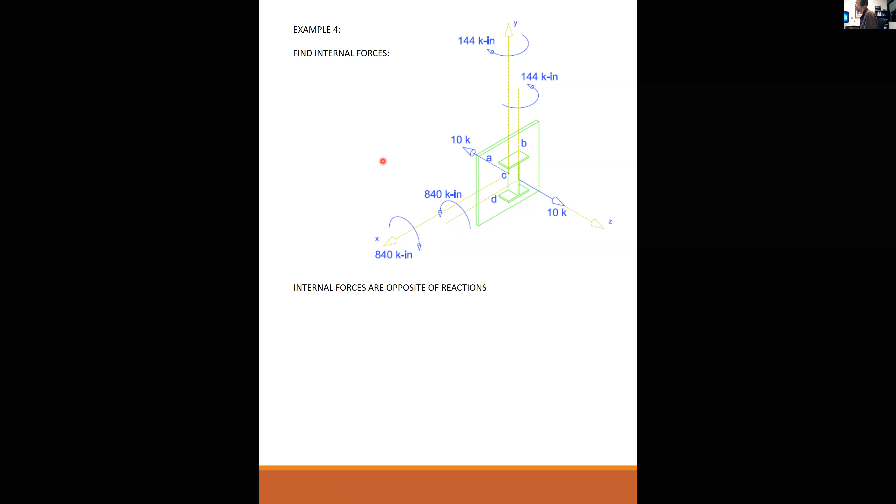So could we use this method like in the exam? Oh, I wouldn't do that. No, no, no, no, no. Change one little thing and this doesn't apply. I'm not saying this is how you should do it. I picked a very complicated problem to show you the complexity of this step. And to get to this step before 8 o'clock tonight, I took that shortcut. I would not recommend you do this on an exam.

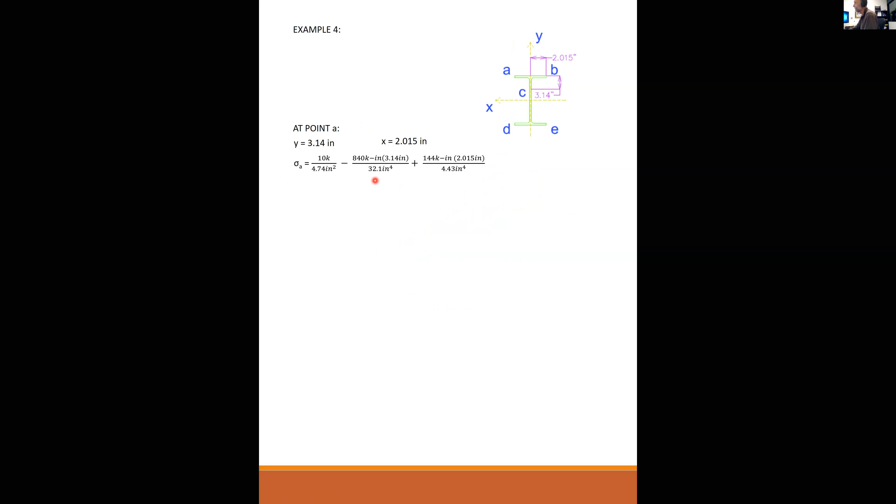It's gonna be another story if there's a moment applied in the beam. You cannot do what you did. If you had any loading applied within the body of this beam, then it doesn't apply because you've got to take your cut points and figure out what's going on internally within there. Again, I took a shortcut to get to the meat of the problem to show you what I wanted to show you. I do not recommend you taking that shortcut on any kind of exam problem. I would not expect you to. I would write the problem so that there's sufficient time for those who have sufficiently studied to do it the proper way.

Any other questions? I mean, we have three whole minutes, so we can really get going on this.

So A and B are in compression because of the internal moment, correct? And then C and D are in tension for the same reasons. Yes and no, I think you're really close. Remember this 10 kip load right here — this would tend to put the whole section in tension. But these two loads here are really cranking in a large bending moment this way and this way. So at the corner of B, both this moment and this moment are ganging up together and really cranking in a lot of compression. For the same reason at corner D, they're both ganging up and creating a lot of tension. And this 10 kips over the whole section isn't really adding a whole lot to that, but it's generally putting the whole section into a little bit of tension. Does that make sense, Nick?

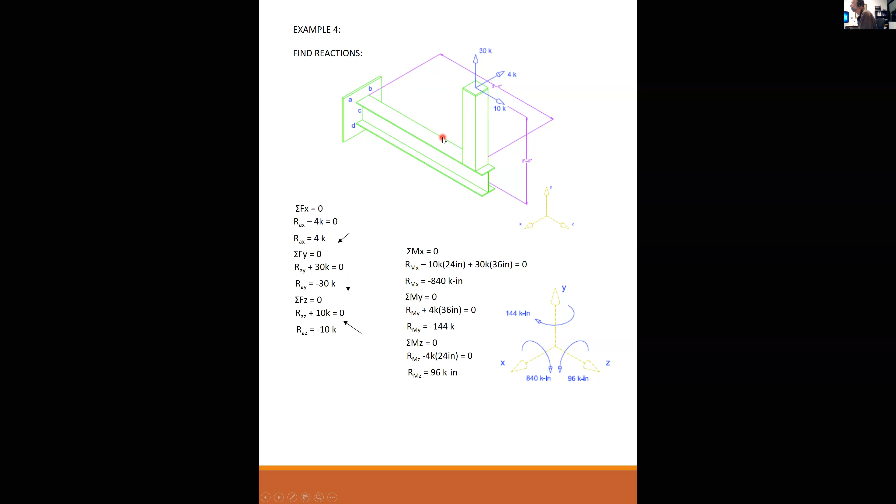Yeah, thank you. Okay, great.

Any other questions? Professor, could you go to slide 111? Slide 111? Yes. How did you know what slide 111 is? Oh, because I have it open over here.

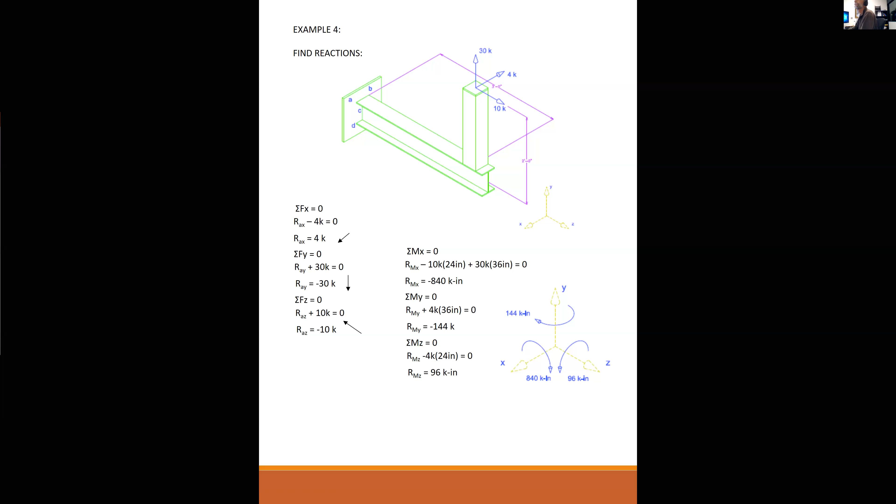I think there's a typo when we talk about the stress on B. Probably. Okay, let's see — come on, baby.

Okay, slide 111. This slide? Yeah, so you have the same exact formula, but different answer. No, they're not exactly the same. What is the difference? Right there and right there. This is positive because it's at A. This is negative because it's at B. All right, I see, thank you.

For once I didn't have a typo. I feel so good about myself. Okay, just kidding.

Any other questions? For the midterm, would we be tested from lecture 10 till lecture 19, or just today? Were you here last lecture? I was a little bit late.

Actually, yeah, we're kind of out of time. I would go back and review that because we talked about it, and we will talk about it again on Tuesday because the midterm is on Thursday. But I already covered that last lecture and we'll talk about it again on Tuesday. Is that okay? Yeah, that works. Thank you, I just wanted to confirm the start date. But if you said in the other video, that works. Thank you so much. Okay, no problem.